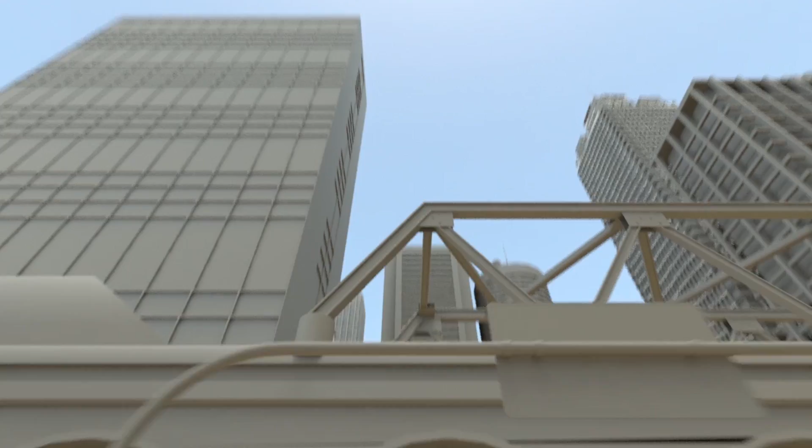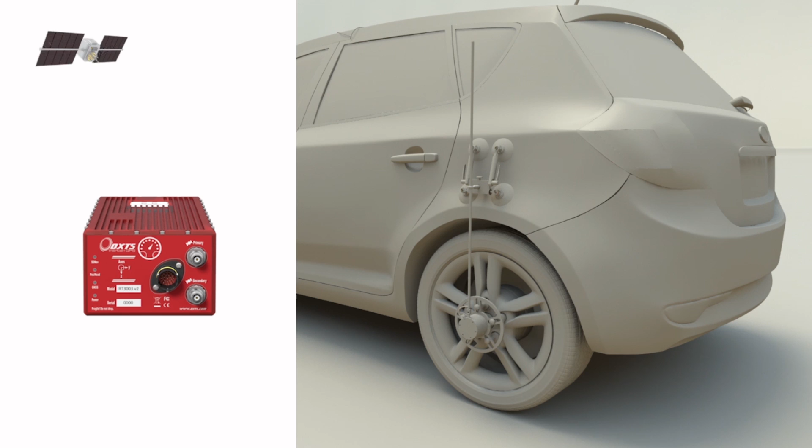Under normal conditions, our products use information from GNSS satellites to control any drift in the Inertial Navigation System, or INS for short. However, in environments where satellite signals are interrupted frequently or blocked for extended lengths of time, a wheel speed input can help reduce drift in the system. It does this by providing the INS with another independent reference.

Configuring a wheel speed input in NAVconfig is quite easy. All we have to do is describe where the measured wheel is in relation to the INS, and how many pulses there will be per meter travelled.

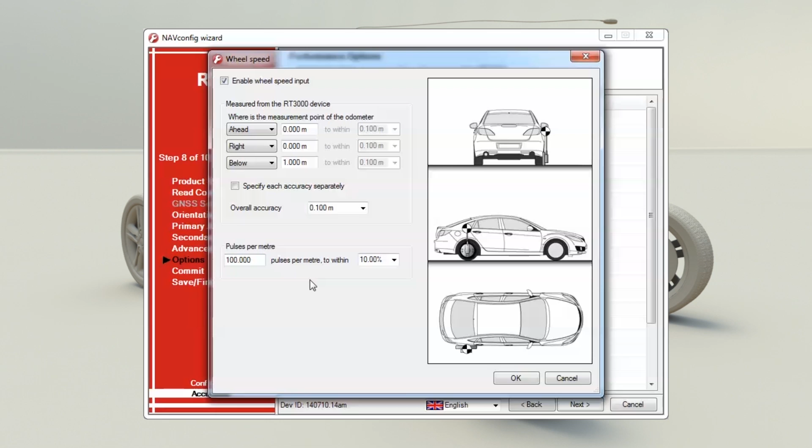When selecting a wheel, bear in mind that you cannot use a wheel that steers, because the system makes some assumptions based on the fact that it won't steer. Also, when sourcing a speed signal directly from a vehicle, make sure it is measured from a wheel and not from the gearbox. Gearbox generated signals won't work, because the speed output is actually split between two wheels.

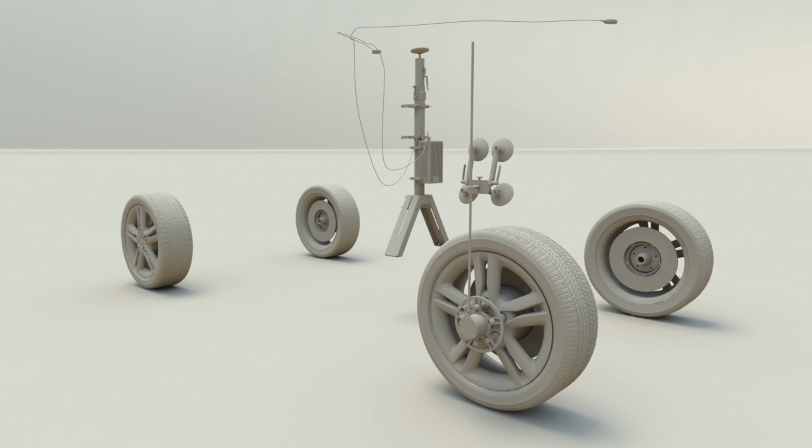Many people acquire a wheel speed signal using an encoder similar to this one. The INS will accept any TTL level signal, and considers less than 0.8 volts as low and greater than 2.4 volts as high. The maximum signal input voltage the INS can handle is 12 volts.

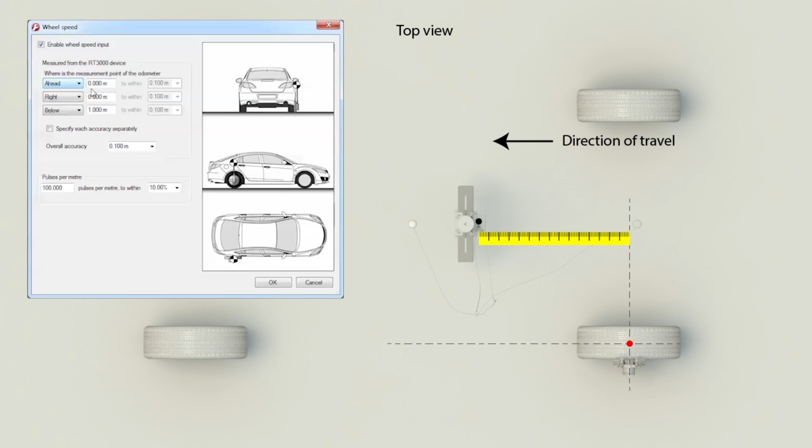So let's go through and configure a wheel speed input. In this case, we would say the wheel is about 0.95 meters behind the INS, 0.75 meters to its left, and 0.9 meters below. We're going to leave the default accuracy set to 0.1 meters, even though we're confident we measured accurately. The final step is to tell the product how many pulses to expect per meter.

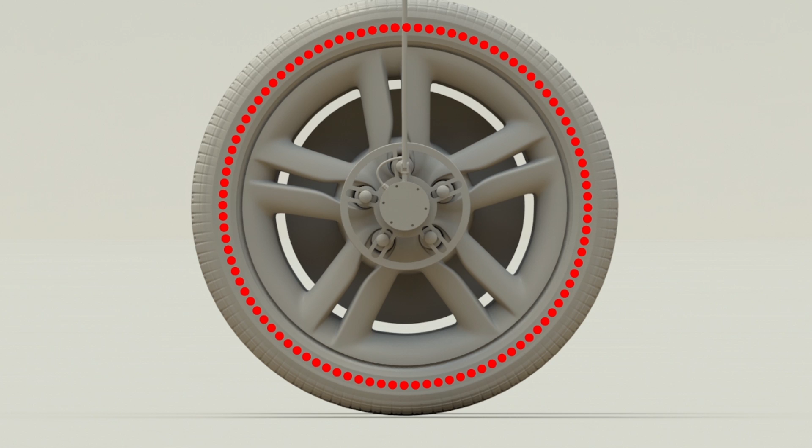At first glance, working this out can appear tricky, but there is a very simple way. First of all, we need to know how many pulses the sensor will generate in one full revolution. In this case, it's 100. Next, we need to know the rolling radius of the wheel, which is easily found by measuring from the center of the wheel to the ground. In this case, it's 0.295 meters.

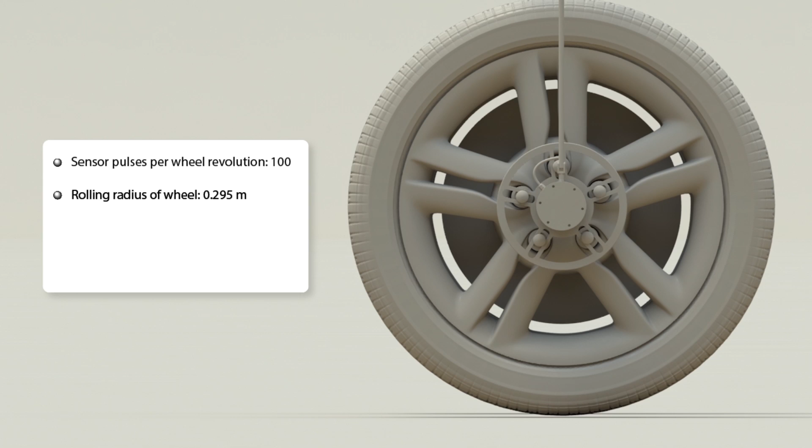Now, simply divide the number of pulses per revolution by the rolling circumference in meters. Converting the rolling radius into a rolling circumference is simply a case of using 2 pi r. In this case, that gives a rolling circumference of 1.854 meters, and dividing that into the number of pulses tells us there will be 54 pulses per meter.

Again, the system uses our data as a starting point, which it then refines in use, so the 10% tolerance here is okay. And that's it on the options page.